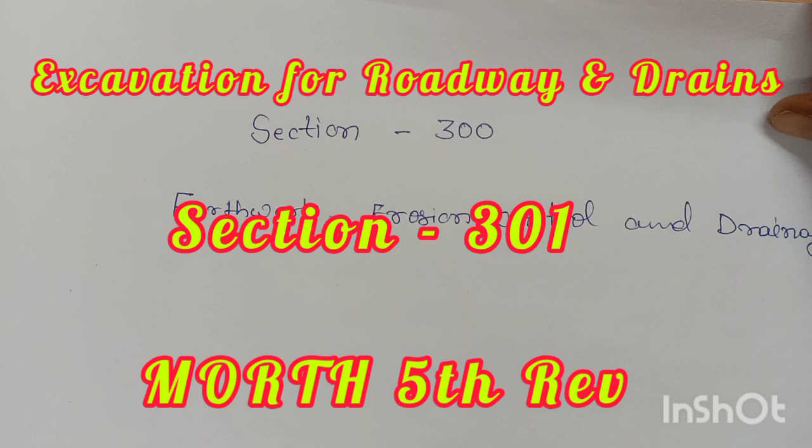300 is divided into many chapters: 301 excavation for roadway and drains, 302 blasting operations, 303 pre-splitting rock excavation slopes, 304 excavation for structures, 305 embankment construction, 306 soil erosion and sedimentation control, 307 turfing with sods.

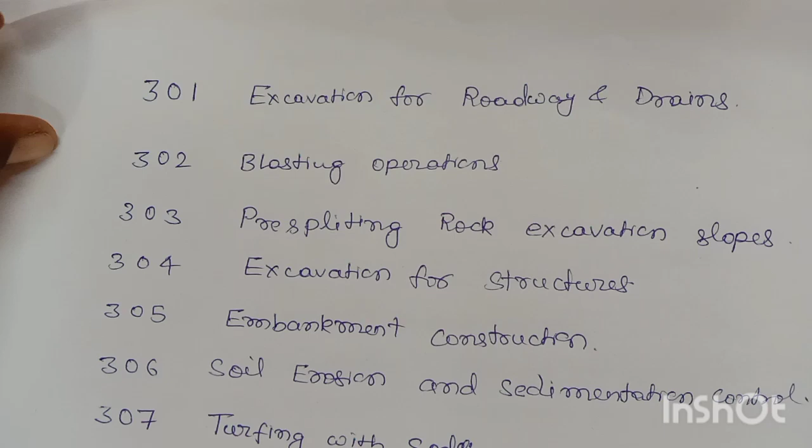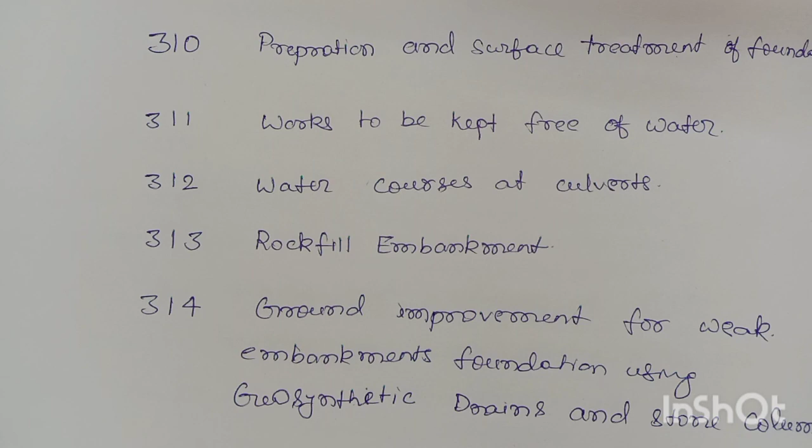308 seeding and mulching, 309 surface and subsurface drains, 310 preparation and surface treatment of foundation, 311 works to be kept free of water, 312 water course at culverts, 313 rock fill embankment, 314 ground improvement for weak embankment foundation using geosynthetic drains and stone columns.

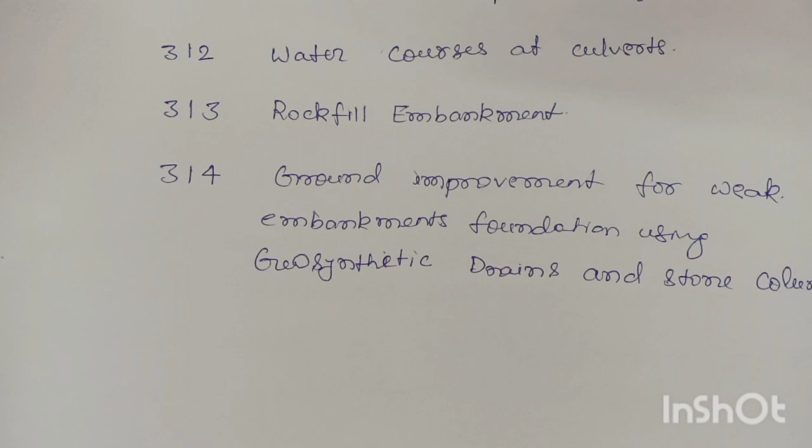301 excavation for roadway and drains. 301.1 scope. These works shall consist of excavation, removal and disposal of materials

necessary for the construction of roadways, side drains and waterways in accordance with requirements of the specification and the lines, grades and cross sections shown in the drawing or as indicated by the engineer.

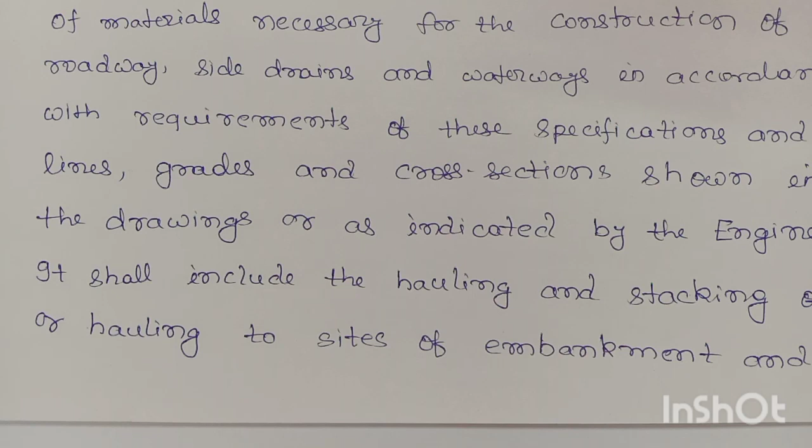It shall include the hauling and stacking, or hauling to sites of embankment and subgrade construction, suitable cut material as required, as also the disposal of unsuitable cut material in a specified manner with all leads and lifts, reuse of cut materials as may be deemed fit, trimming and finishing of the road to a specified dimension or as directed by the engineer.

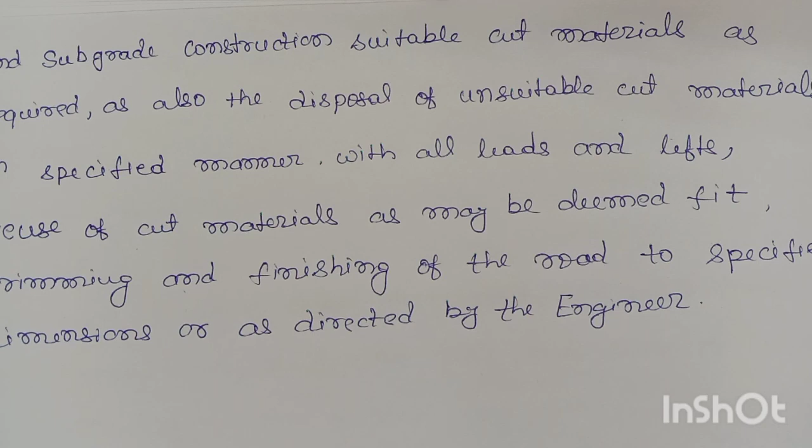Classification of excavated material. Classification: all materials involved in excavation shall be classified by the engineer in the following manner.

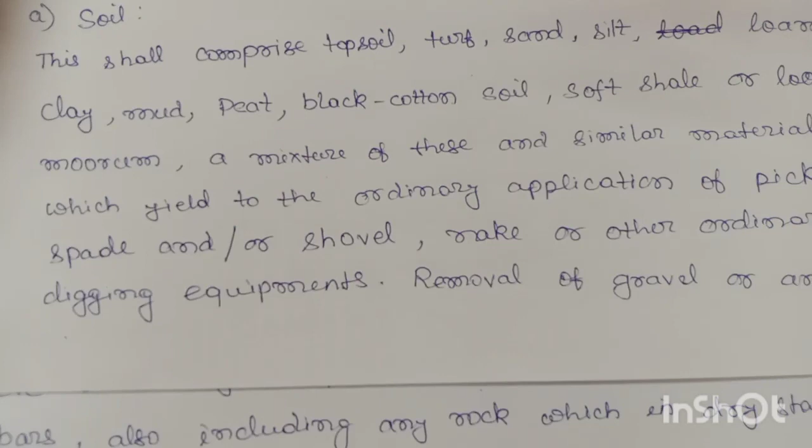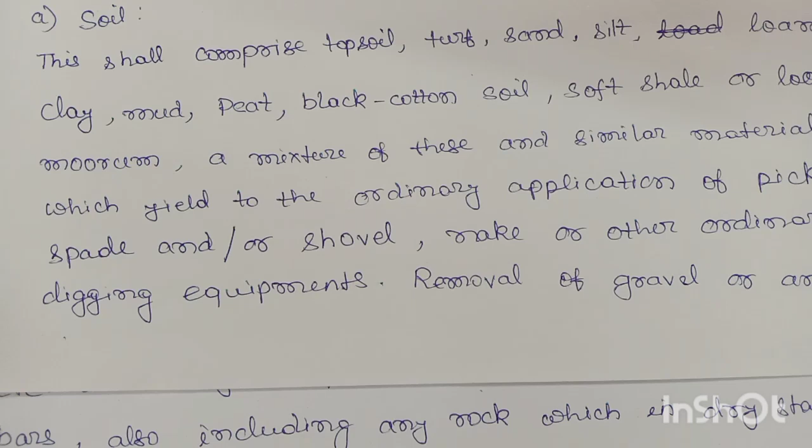Soil: this shall comprise topsoil, sand, silt, loam, clay, mud, peat, black cotton soil, soft shale or loose moorum, a mixture of these and similar material which yield to the ordinary application of pick, spade and or shovel, rake or other ordinary digging equipment. Removal of gravel or any other nodular material having dimension in any one direction not exceeding 75 mm shall be deemed to be covered under this category.

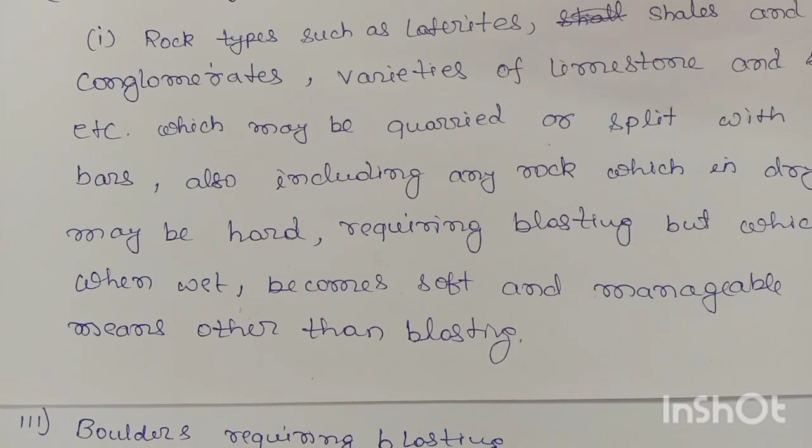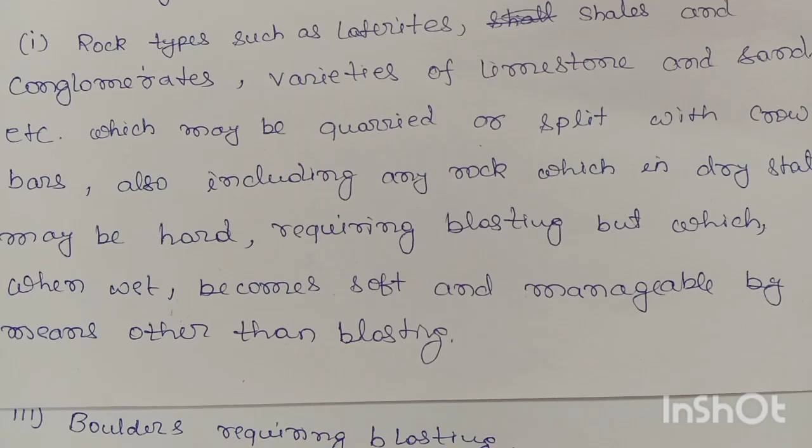Ordinary rock not requiring blasting: this shall include rock types such as laterite, shales, and conglomerates, variety of limestone and sandstone etc., which may be quarried or split with crowbar, also including any rock which in dry state may be hard, requiring blasting, but which when wet becomes soft and manageable by means other than blasting.

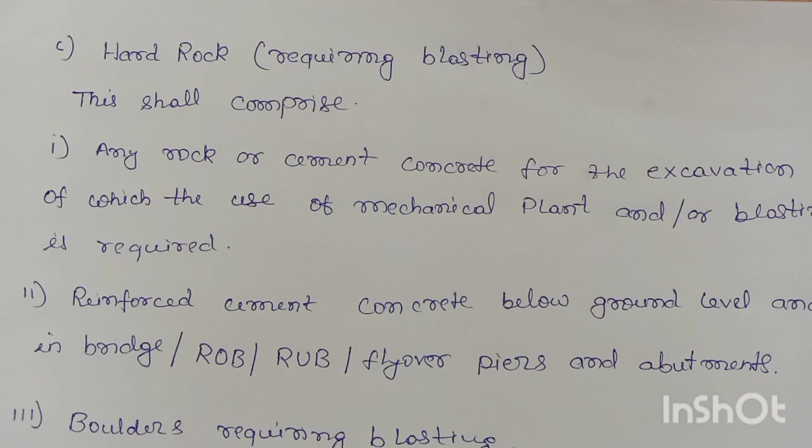Hard rock requiring blasting: this shall comprise any rock or cement concrete for the excavation of which the use of mechanical plant and or blasting is required. Second, reinforced cement concrete below ground level and in bridge, ROB, RUB, flyover, piers and abutments.

Boulders requiring blasting. Hard rock using controlled blasting: hard rock requiring blasting as described under C, but where controlled blasting is to be carried out in locations where built up areas, huts are situated within

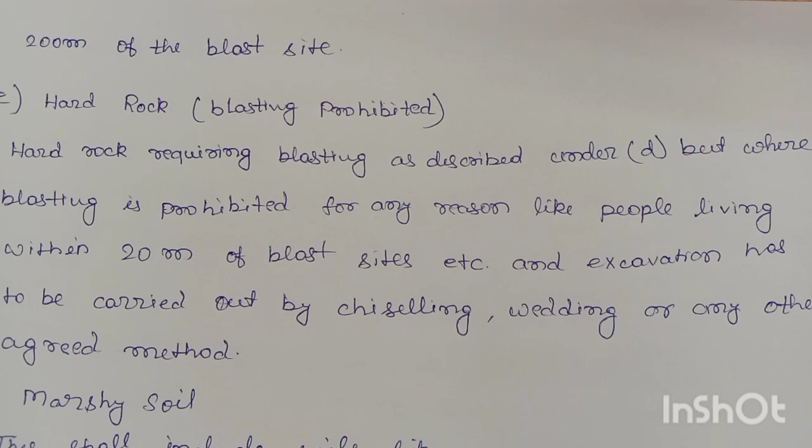200 meters of the blast site. Hard rock blasting prohibited: hard rock requiring blasting as described under D, but where blasting is prohibited for any reason like people living within 20 meters of blast site etc., and excavation has to be carried out by chiseling, wedging, or any other agreed method.

Marshy soil: this shall include soil like soft clay and peat, excavated below the original ground level of marshes and swamps, and soil excavated from other areas requiring continuous pumping or bailing out of water.

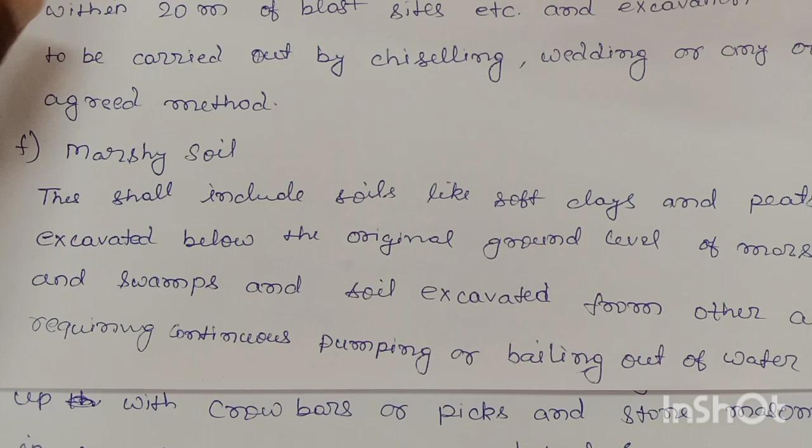Second number, macadam surface such as water bound and bitumen bound, soling of roads, road cement concrete pavements, cobble stone etc., compacted moorum or stabilized soil requiring use of pickaxe or shovel or both.

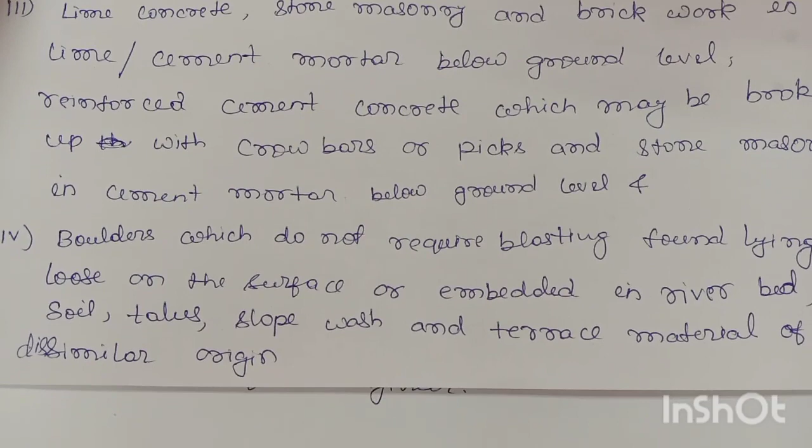Third number, lime concrete, stone masonry, and brickwork in lime cement mortar below ground level. Reinforced cement concrete, which may be broken up with crowbar or pick, and stone masonry in cement mortar below ground level. Boulders which do not require blasting, found laying loose on the surface or embedded in riverbed, soil, talus, slope wash and terrace material of dissimilar origin.

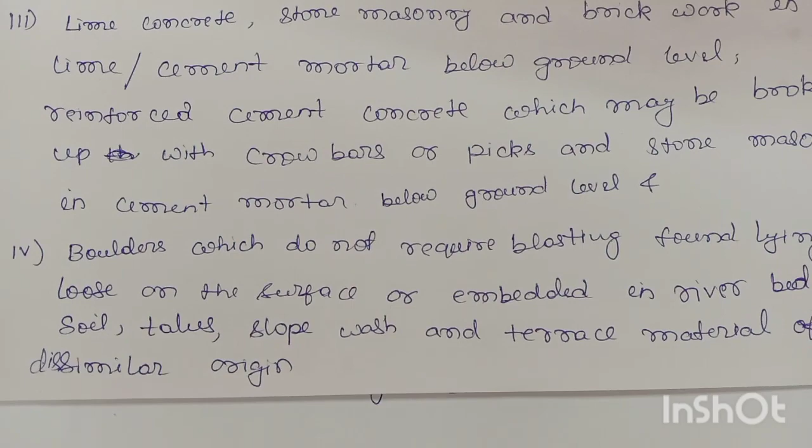301.2.2 Authority for classification. The classification of excavation shall be decided by the engineer and his decision shall be final and binding on the contractor. Merely the use of explosive in excavation will not be considered as a reason for higher classification unless blasting is clearly necessary in the opinion of the engineer.

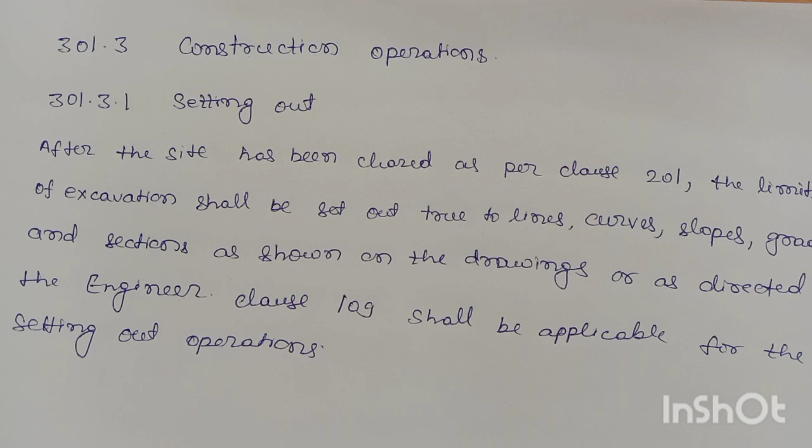301.3 Construction operation. 301.3.1 Setting out: after the site has been cleared as per clause 201, the limits of excavation shall be set out true to lines, curves, slopes, grades, and sections as shown on the drawing or as directed by the engineer. Clause 109 shall be applicable for the setting out operation.

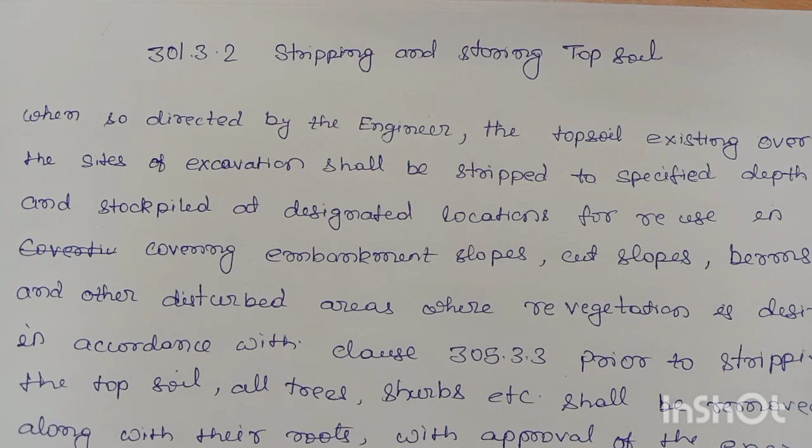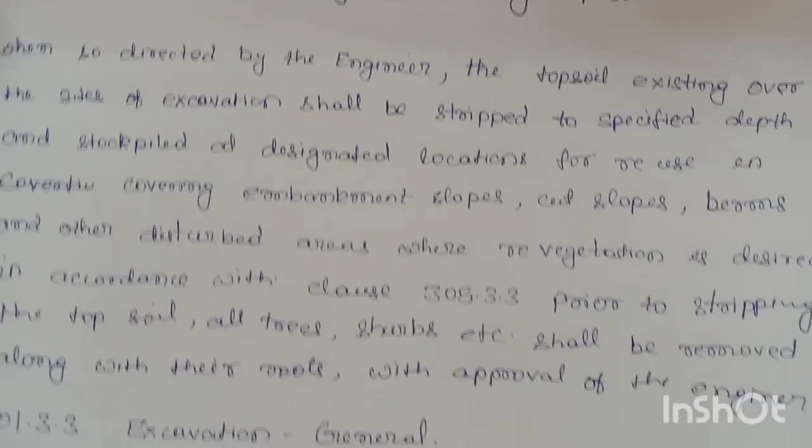301.3.2 Stripping and storage of topsoil. When so directed by the engineer, the topsoil existing over the site of excavation shall be stripped to a specified depth and stockpiled at a designated location for use in covering embankment slopes, cut slopes, berms, and other disturbed areas where revegetation is desired, in accordance with clause 305.3.3. Prior to stripping the topsoil, all trees, shrubs, etc. shall be removed, along with their roots, with approval of the engineer.

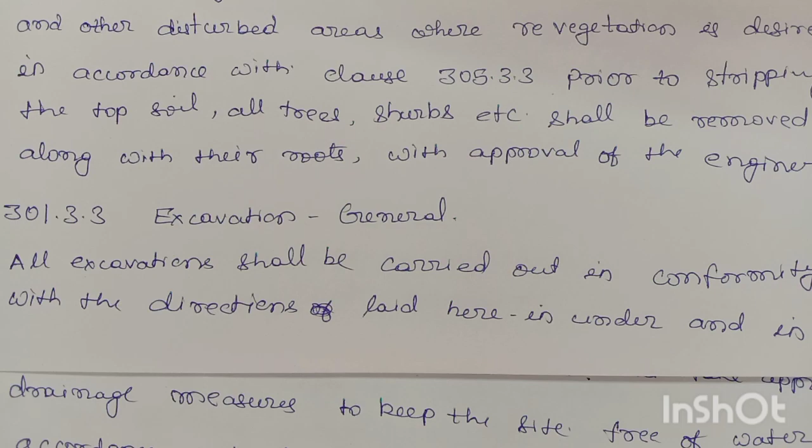301.3.3 Excavation General. All excavations shall be carried out in conformity with the direction laid herein under and in a manner approved by the engineer. The work shall be so done that the suitable materials available from excavation are satisfactorily utilized as deemed fit or as approved by the engineer.

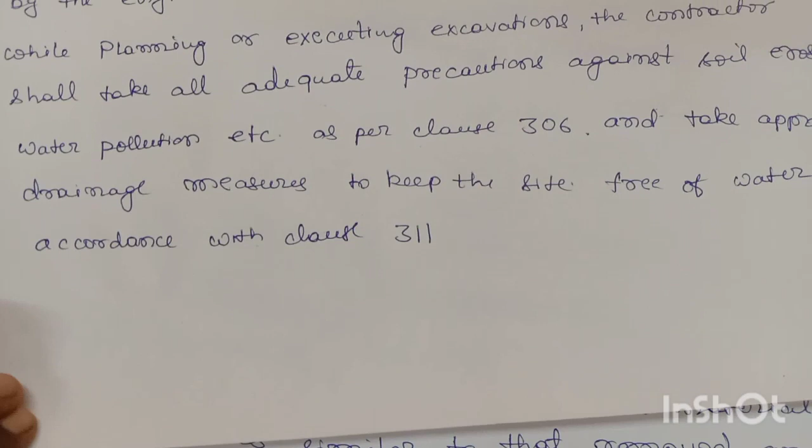While planning or executing excavation, the contractor shall take all adequate precautions against soil erosion, water pollution, etc., as per clause 306, and take appropriate drainage measures to keep the site free of water in accordance with clause 311.

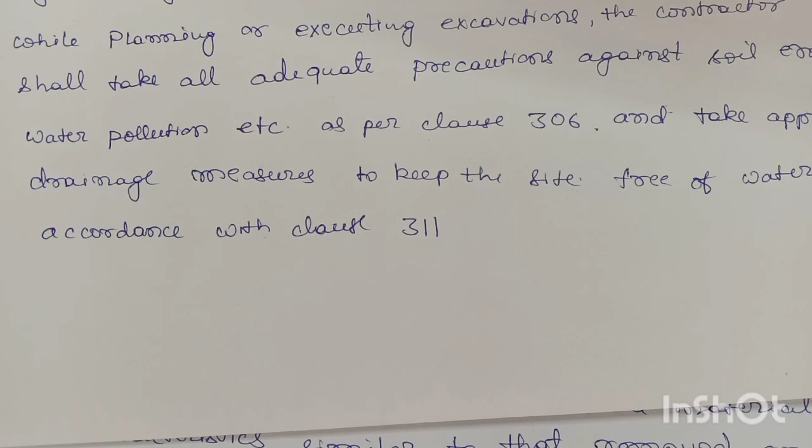The excavation shall conform to the lines, grades, side slopes, and levels shown on the drawing or as directed by the engineer. The contractor shall not excavate outside the limits of excavation, subject to the permitted tolerances.

Any excess depth or width excavated beyond the specified levels or dimensions on the drawing shall be made good at the cost of the contractor with suitable material of characteristics similar to that removed and compacted to the requirement of clause 305.

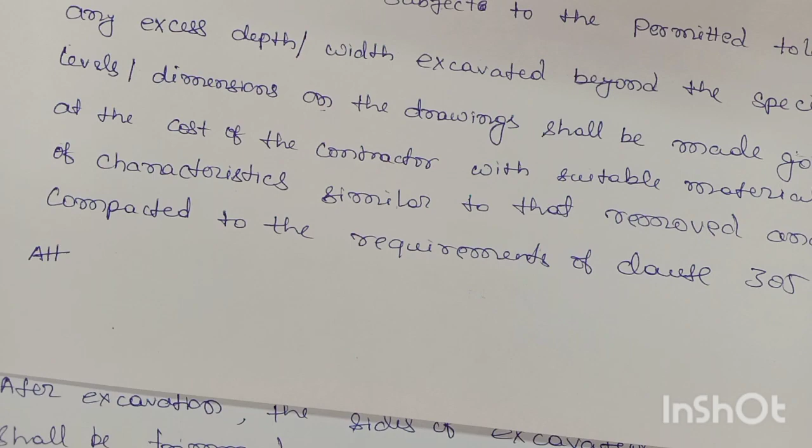All debris and loose materials on the slopes of cutting shall be removed. No backfilling shall be allowed to obtain required slopes, excepting that when boulders or soft materials are encountered in cut slopes. These shall be excavated to an approved depth on instruction of the engineer and the resulting cavities filled with suitable material and thoroughly compacted.

In an appropriate manner, after excavation, the sides of the excavated area shall be trimmed and the area contoured to minimize erosion and ponding, allowing for natural drainage to take place.

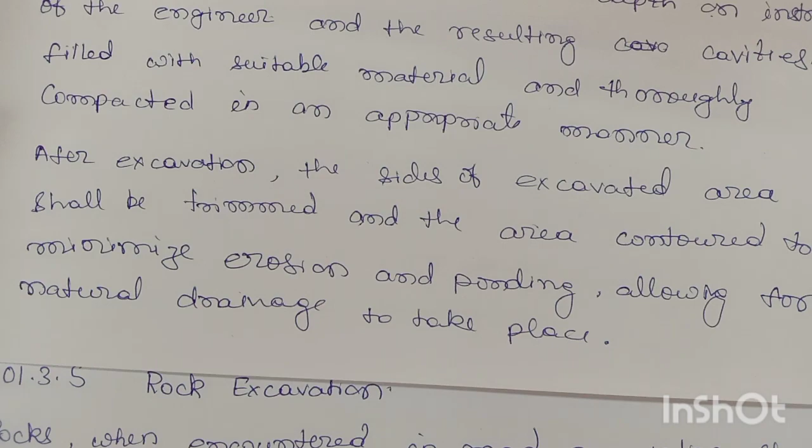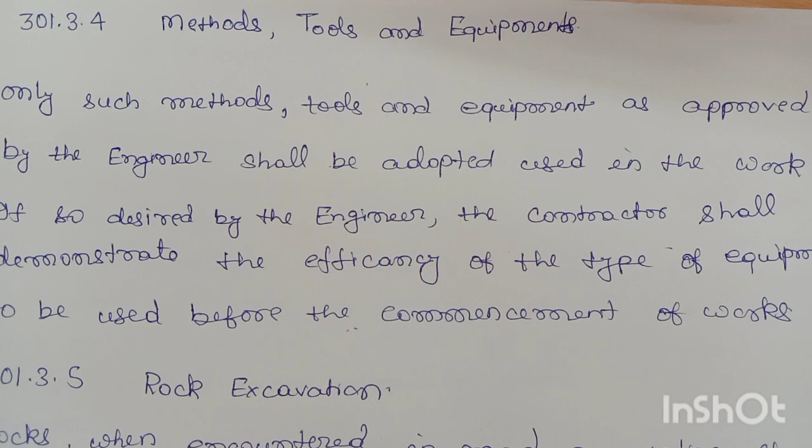301.3.4 Methods, tools and equipments. Only such methods, tools and equipments as approved by the engineer shall be adopted or used in the work. If so desired by the engineer, the contractor shall demonstrate the efficacy of the type of equipment to be used before the commencement of work.

301.3.5 Rock excavation. Rock, when encountered in road excavation, shall be removed up to the formation level or as otherwise indicated in the drawing. Where, however, unstable shales or other unsuitable material are encountered at the formation level, these shall be excavated to the extent of 500 mm below the formation level or as otherwise specified.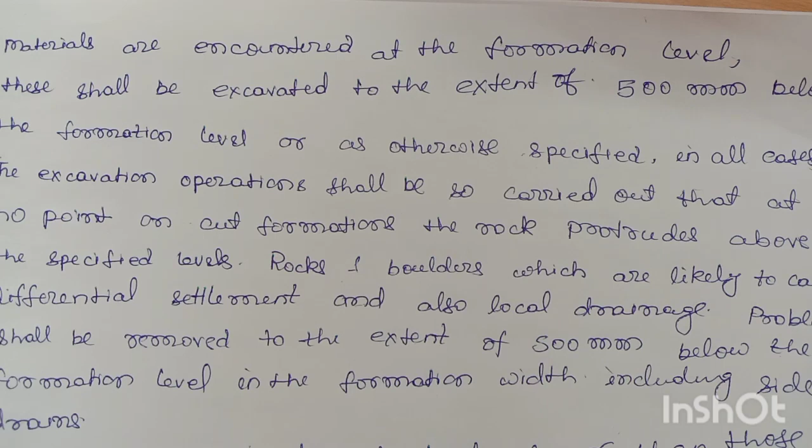In all cases, the excavation operation shall be so carried out that at no point on the cut formation does the rock protrude above the specified levels. Rock boulders which are likely to cause differential settlement and also local drainage problems shall be removed to the extent of 500 mm below the formation level.

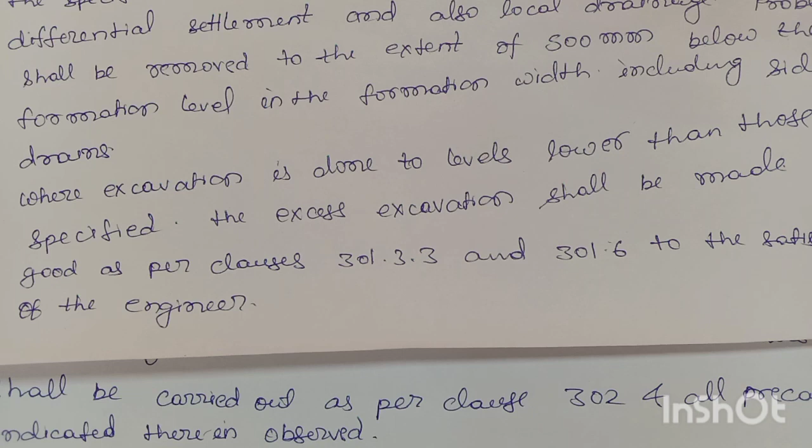In the formation width, including side drains, where excavation is done to levels lower than those specified, the excess excavation shall be made good as per clause 301.3.3 and 301.6 to the specification of the engineer, to the satisfaction of the engineer.

Slopes in rock cutting shall be finished to uniform lines corresponding to slope lines shown on the drawing or as directed by the engineer. Notwithstanding the foregoing, all loose pieces of rock on the excavated slope surface which move when pierced by a crowbar shall be removed.

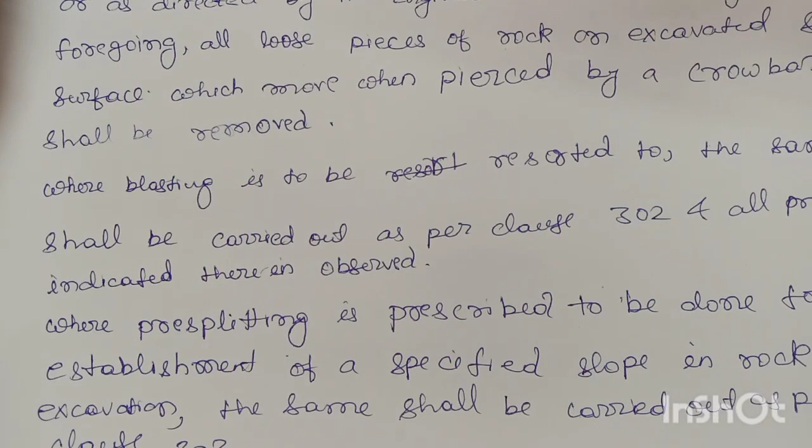Where blasting is to be resorted to, the same shall be carried out as per clause 302, and all precautions indicated therein observed. Where pre-splitting is prescribed to be done for the establishment of a specified slope in rock excavation, the same shall be carried out as per clause 303.

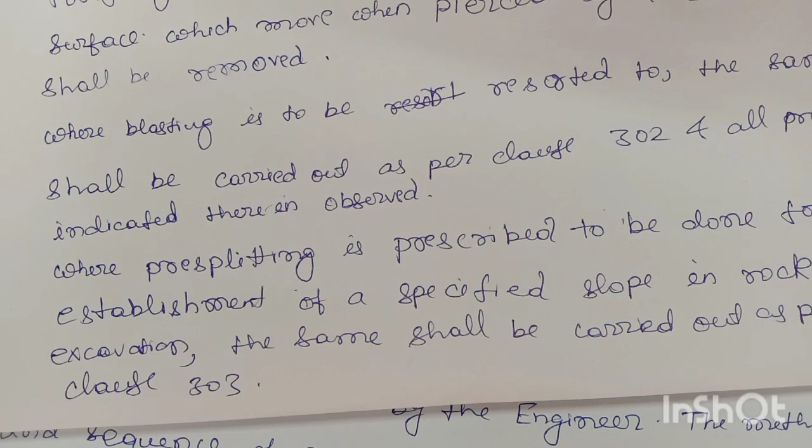301.3.6 Marsh excavation. The excavation of soil from marshes and swamps shall be carried out as per the program approved by the engineer. Excavation of marshes shall begin at one end and proceed in one direction across the entire marsh, immediately ahead of backfilling with material like boulders, sand, moorum, brick bats, dismantled concrete as approved by the engineer. The method and sequence of excavating and backfilling shall be such as to ensure, to the extent practicable, the complete removal or displacement of all muck.

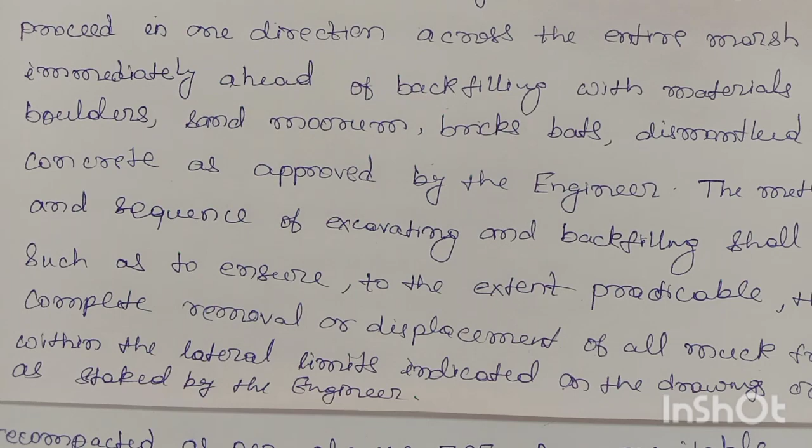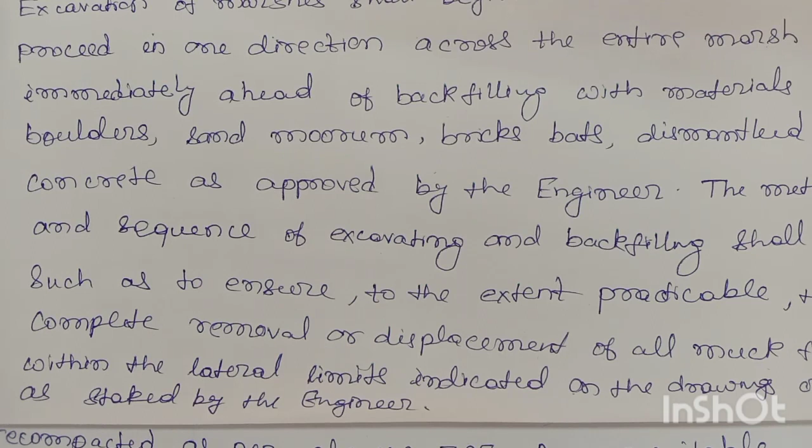The complete removal or displacement of all muck from within the lateral limits indicated on the drawing or as staked by the engineer.

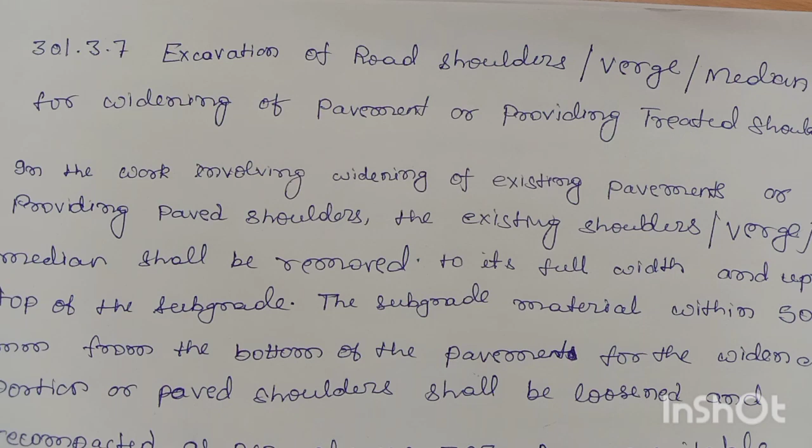301.3.7 Excavation of road shoulders, verge, median for widening of pavement or providing treated shoulders. In work involving widening of existing pavements or providing paved shoulders, the existing shoulder, verge, median shall be removed to its full width and up to the top of the subgrade. The subgrade material within 500 mm from the bottom of the pavement for the widened portion or paved shoulder shall be loosened and compacted as per clause 305.

Any unsuitable material found in this portion shall be removed and replaced with suitable material. While doing so, care shall be taken to see that no portion of the existing pavement designated for retention is loosened or disturbed. If the existing pavement gets disturbed or loosened, it shall be dismantled and cut to a regular shape with sides vertical, and the disturbed loosened portion removed completely and relayed as directed by the engineer at the cost of the contractor.

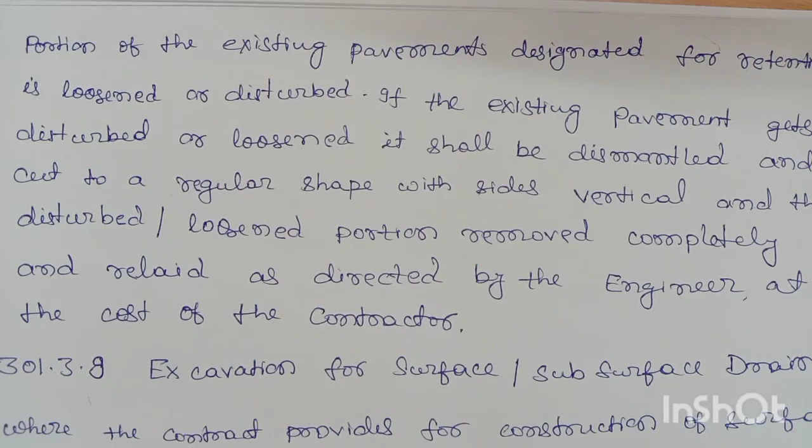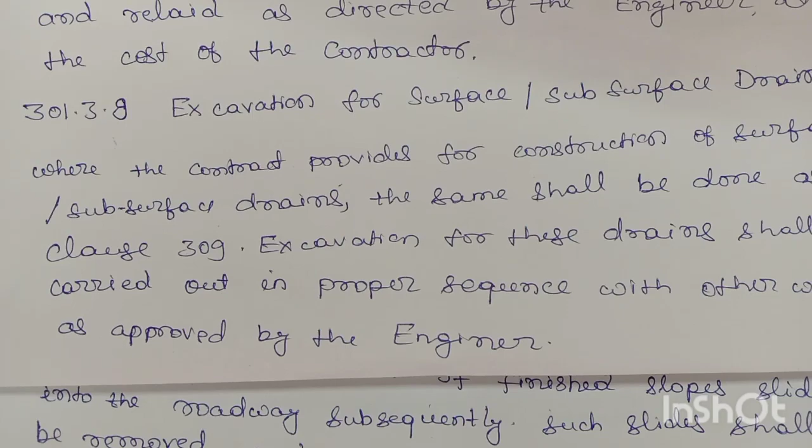301.3.8 Excavation for subsurface drains, where the contract provides for construction of surface drains, the same shall be done as per clause 309. Excavation for these drains shall be carried out in proper sequence with other works as approved by the engineer.

301.3.9 Slides. If slips, slides, over breaks or subsidence occur in cutting during the process of construction, they shall be removed at the cost of the contractor as ordered by the engineer. Adequate precautions shall be taken to ensure that during construction the slopes are not rendered unstable or give rise to recurrent slides after construction. If finished slopes slide into the roadway, subsequently such slides shall be removed and paid for at the contract rate for the class of excavation involved, provided the slides are not due to any negligence on the part of the contractor.

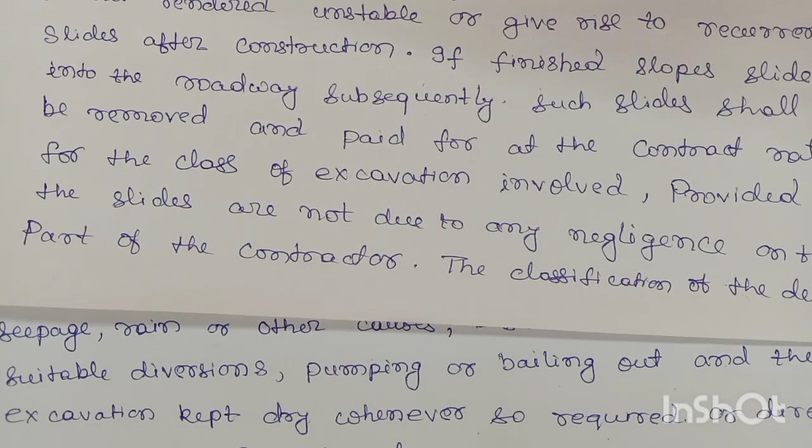The classification of the debris material from the slips, slides, etc. shall conform to its condition at the time of removal, and payment made accordingly, regardless of its condition earlier.

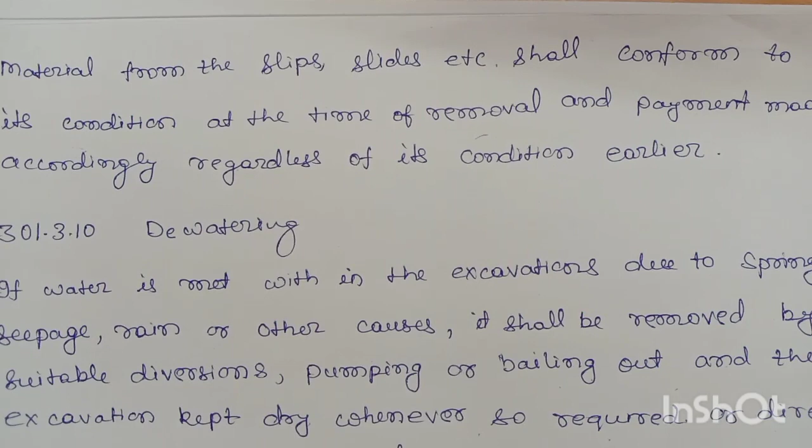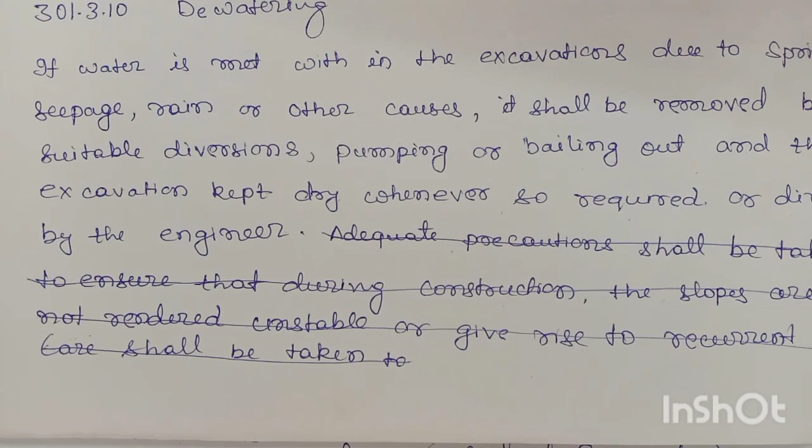301.3.10 Dewatering. If water is met with in the excavation due to springs, seepage, rain or other causes, it shall be removed by suitable diversion, pumping or bailing out, and the excavation kept dry whenever so required or directed by the engineer.

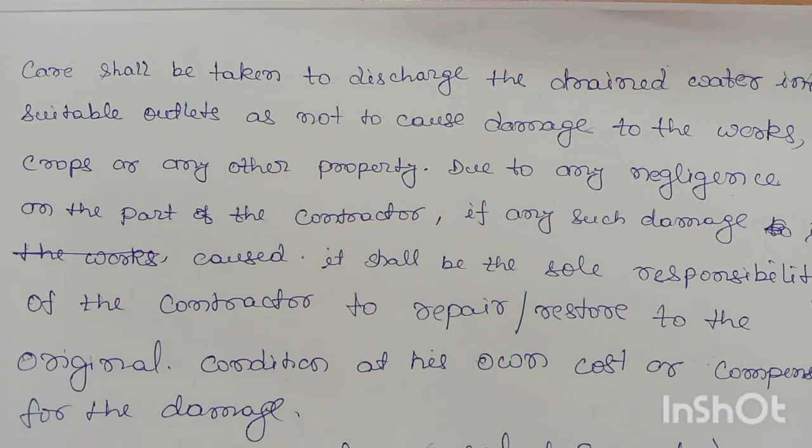Care shall be taken to discharge the drained water into suitable outlets so as not to cause damage to the works, crops, or any other property due to any negligence on the part of the contractor. If any such damage is caused, it shall be the sole responsibility of the contractor to repair, restore to the original condition at his own cost, or compensate for the damage.

301.3.11 Use and disposal of excavated material. All the excavated materials shall either be reused with the approval of the engineer or disposed of with all leads and lifts as directed by the engineer.

301.3.12 Backfilling. Backfilling of the masonry, concrete, hume pipe, or drain excavation shall be done with approved material, with all leads and lifts, after concrete masonry hume pipe is fully set, and carried out in such a way as not to cause undue thrust on any part of the structure and or not to cause differential settlement.

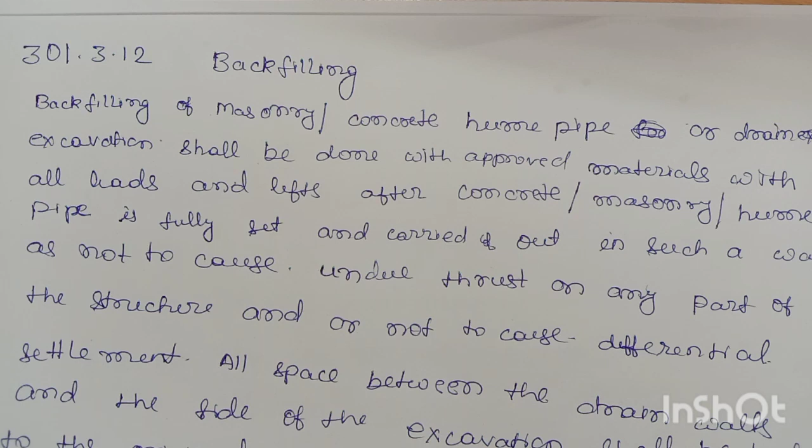All space between the drain walls and the side of the excavation shall be backfilled to the original surface, making due allowance for settlement in layers not exceeding 150 mm compacted thickness to the required density, using suitable compaction equipment such as trench compactor, mechanical tamper, rammer, or plate compactor as directed by the engineer.

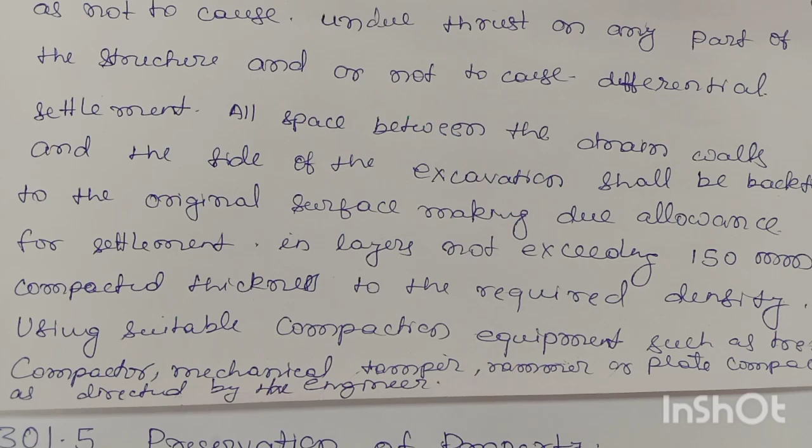301.4 Plying of construction traffic. Construction traffic shall not use the cut formation and finished subgrade without the prior permission of the engineer. Any damage arising out of such use shall be made good by the contractor at his own cost.

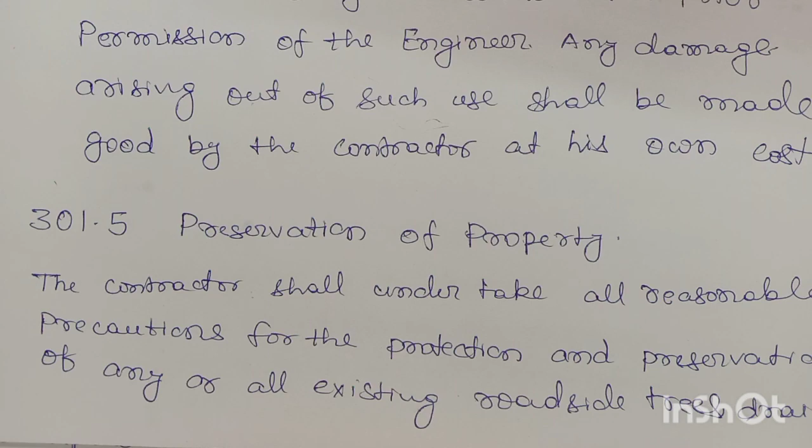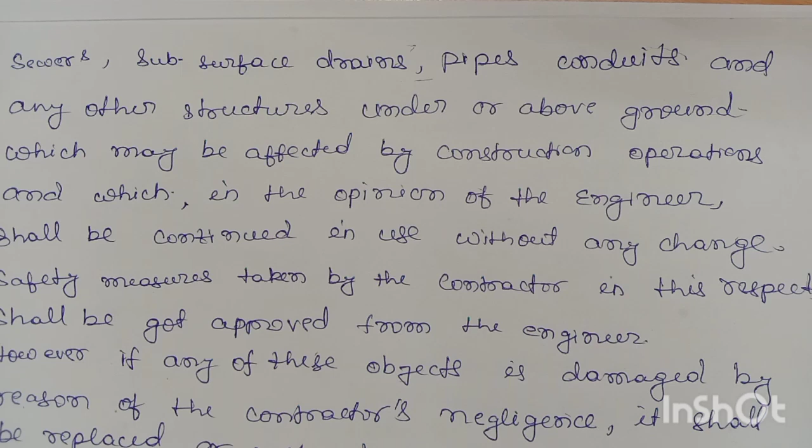301.5 For the preservation of property, the contractor shall undertake all reasonable precautions for the protection and preservation of any or all existing roadside trees, drains, sewer, subsurface drains, pipes, conduit, and any other structures under or above ground which may be affected by construction operation and which, in the opinion of the engineer, shall be continued in use without any change. Safety measures taken by the contractor in this respect shall be got approved from the engineer.

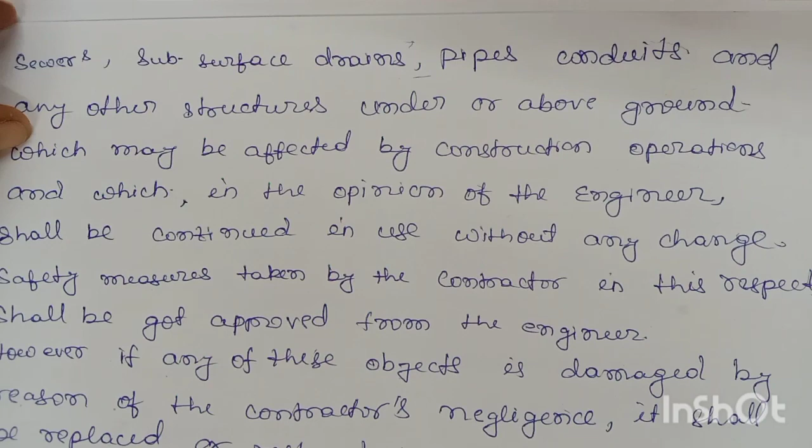However, if any of these objects is damaged by reason of the contractor's negligence, it shall be replaced or restored to the original condition at his cost.

If the contractor fails to do so within the required time as directed by the engineer, or if in the opinion of the engineer the action initiated by the contractor to replace or restore the damaged objects is not satisfactory, the engineer shall arrange the replacement or restoration directly through any other agency at the risk and cost of the contractor, after issuing prior notice to that effect.

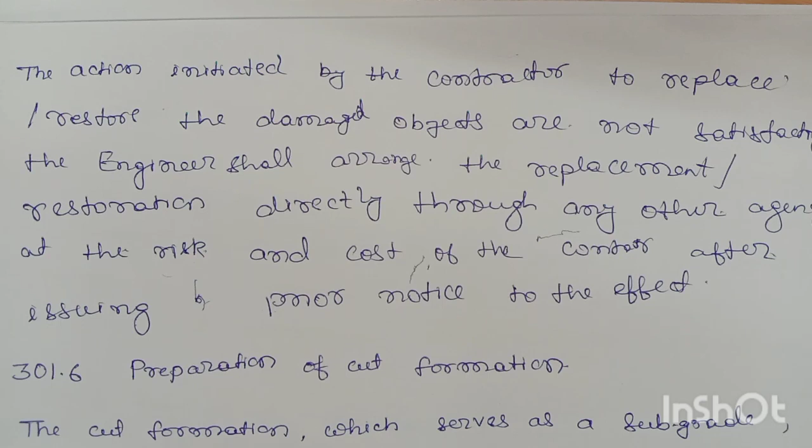Preparation of cut formation.

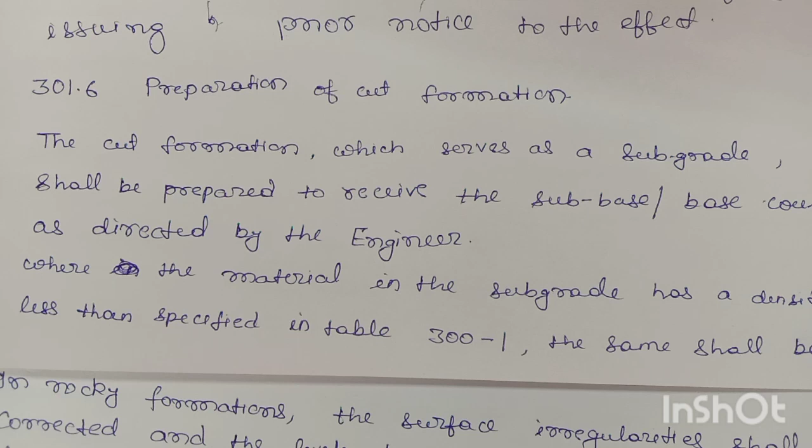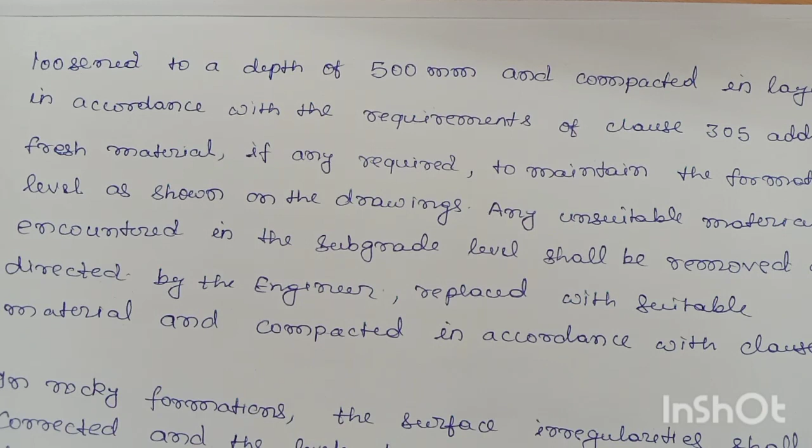The cut formation which serves as a subgrade shall be prepared to receive the base course as directed by the engineer. Where the material in the subgrade has a density less than specified in table 300-1, the same shall be loosened to a depth of 500 mm and compacted in layers in accordance with the requirements of clause 305, adding fresh material if required to maintain the formation level as shown in the drawing. Any unsuitable material encountered in the subgrade level shall be removed as directed by the engineer, replaced with suitable material and compacted in accordance with clause 305.

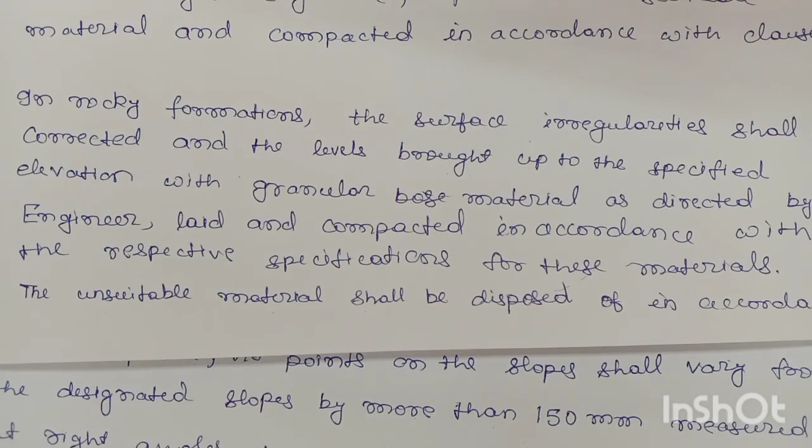In rocky formation, the surface irregularities shall be corrected and the level brought up to the specified elevation with granular base material as directed by the engineer, laid and compacted in accordance with the respective specification for the materials. The unsuitable materials shall be disposed of in accordance with clause 301.3.11. After satisfying the density requirement, the cut formation shall be prepared to receive the base course in accordance with clause 310 and 311.

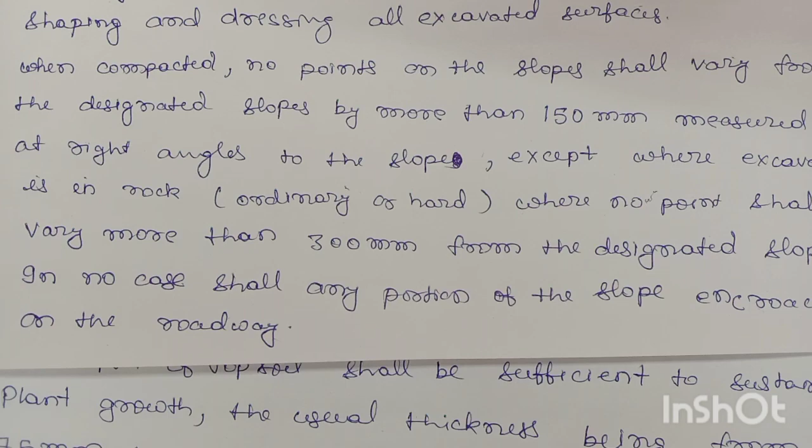Finishing operations shall include the work of properly shaping and dressing all excavated surfaces. When compacted, no points on the slope shall vary from the designated slope by more than 150 mm measured at right angles to the slope, except where excavation is in rock, ordinary or hard, where no point shall vary more than 300 mm from the designated slope. In no case shall any portion of the slope encroach on the roadway.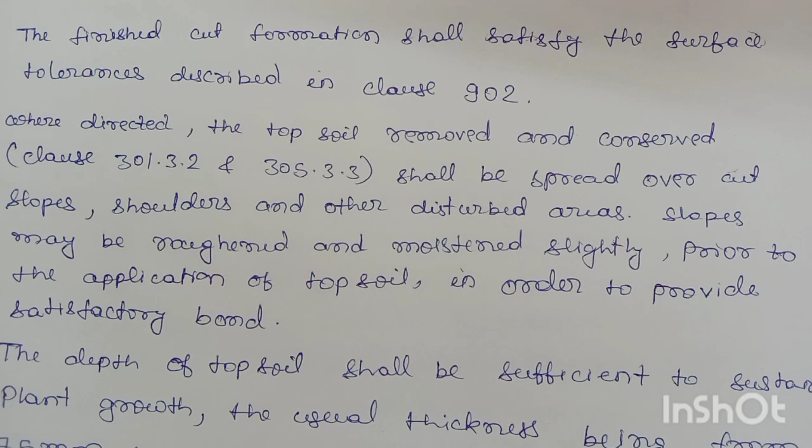The finished cut formation shall satisfy the surface tolerance described in clause 902, where directed the topsoil removed and conserved as per clause 301.3.2 and 305.3.3 shall be spread over cut slopes, shoulders, and other disturbed areas. Slopes may be roughened and moistened slightly prior to the application of topsoil in order to provide satisfactory bond. The depth of topsoil shall be sufficient to sustain plant growth, the usual thickness being from 75 mm to 100 mm.

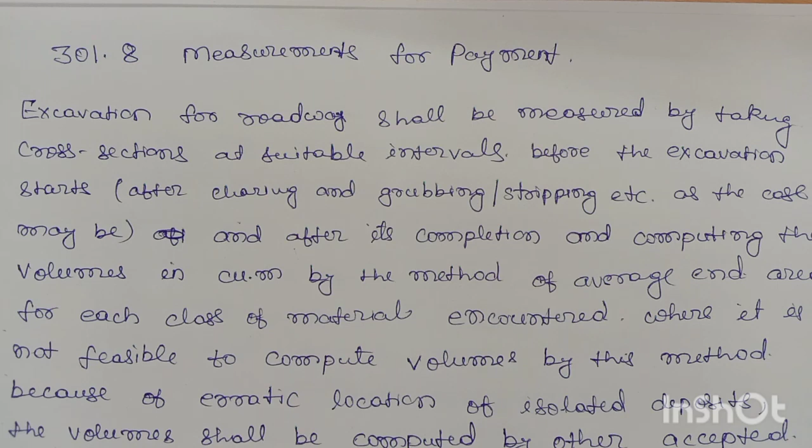301.8 Measurement for payments. Excavation for roadway shall be measured by taking cross sections at suitable intervals before the excavation starts, after clearing and grubbing, stripping etc. as the case may be, and after its completion, and computing the volumes in cum by the method of average end areas for each class of material encountered. Where it is not feasible to compute volumes by the method because of erratic location of isolated deposits, the volume shall be computed by other accepted methods.

At the option of the engineer, the contractor shall leave depth indicators during excavation of such shapes and size and in such position as directed, so as to indicate the original ground level as accurately as possible. The contractor shall see that these remain intact till the final measurements are taken.

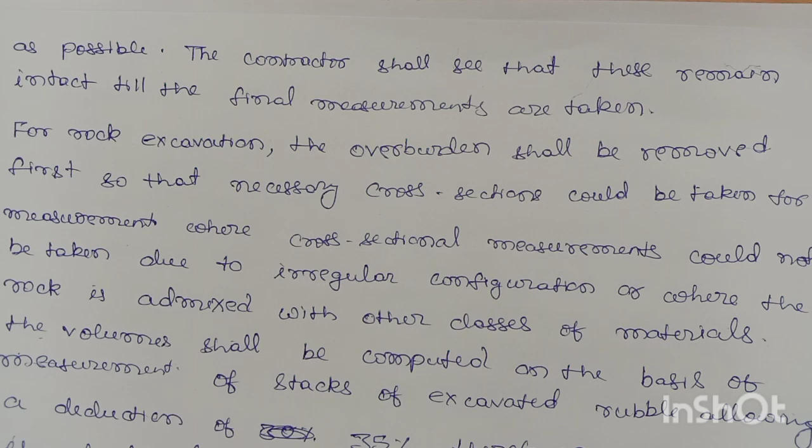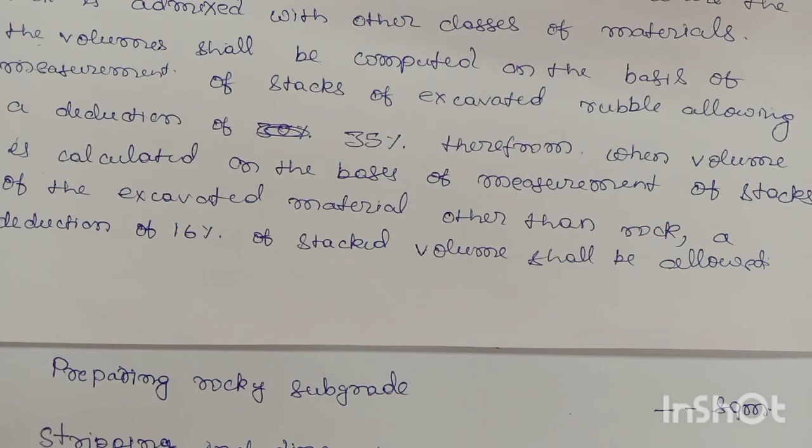For rock excavation, the overburden shall be removed first so that necessary cross-sections would be taken for measurement, where cross-sectional measurement could not be taken due to irregular configuration or where the rock is admixed with other classes of material. The volume shall be computed on the basis of measurement of stacks of excavated rubble, allowing a deduction of 35% therefrom. When volume is calculated on the basis of the measurement of stacks of the excavated material other than rock, a deduction of 16% of stocked volume shall be allowed.

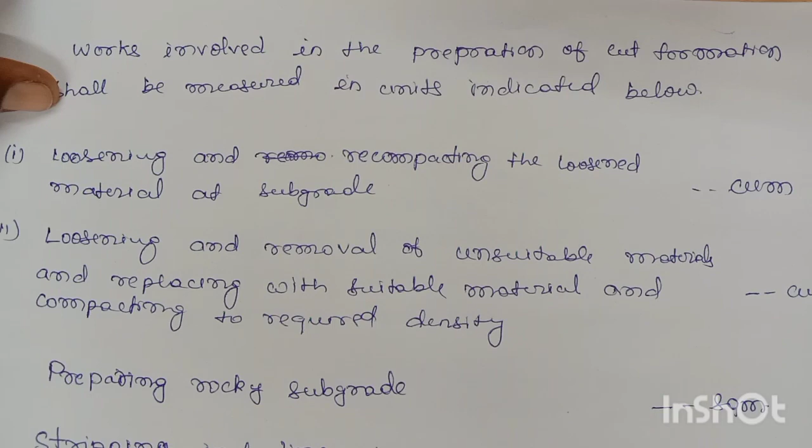Work involved in the preparation of cut formation shall be measured in units indicated below: loosening and recompacting the loosened material at subgrade in cum; loosening and removal of unsuitable material and replacing with suitable material and compacting to required density in cum; preparing rocky subgrade in square meter; stripping including storing and application of topsoil in cum.

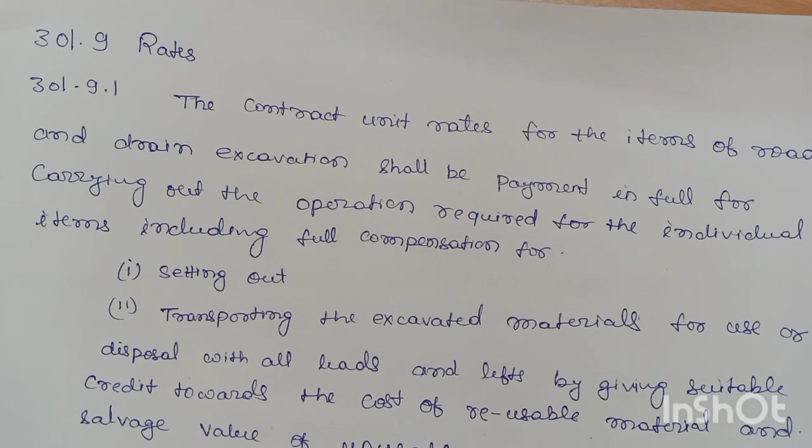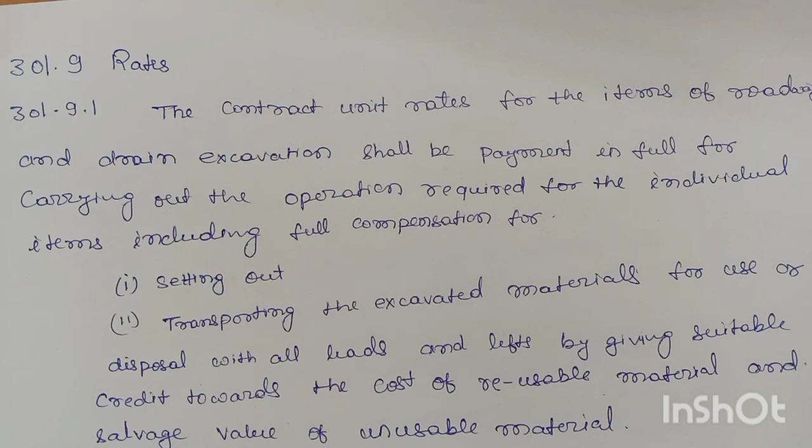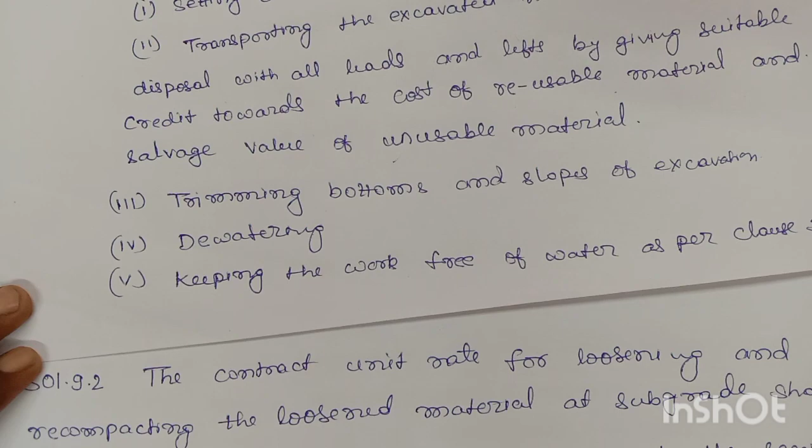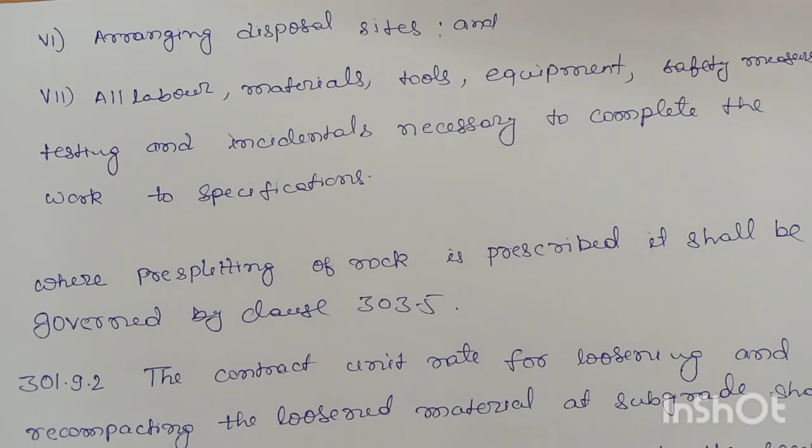301.9 Rates. The contract unit rate for the item of roadway excavation shall be payment in full for carrying out the operations required for the individual items, including full compensation for setting out, transporting the excavated material for use or disposal with all leads and lifts, giving suitable credit towards the cost of reusable materials and salvage value of unusable material, trimming bottoms and slopes of excavation, dewatering, keeping the work free of water as per clause 311, arranging disposal sites, and all labor, materials, tools, equipment, safety measures, testing and incidentals necessary to complete the work to specification. Where pre-splitting of rock is prescribed, it shall be governed by clause 303.5.

301.9.2 The contract unit rate for loosening and recompacting the material at subgrade shall include full compensation for loosening to the specified depth, including breaking clods, spreading in layers, watering where necessary, and compacting to the requirements.

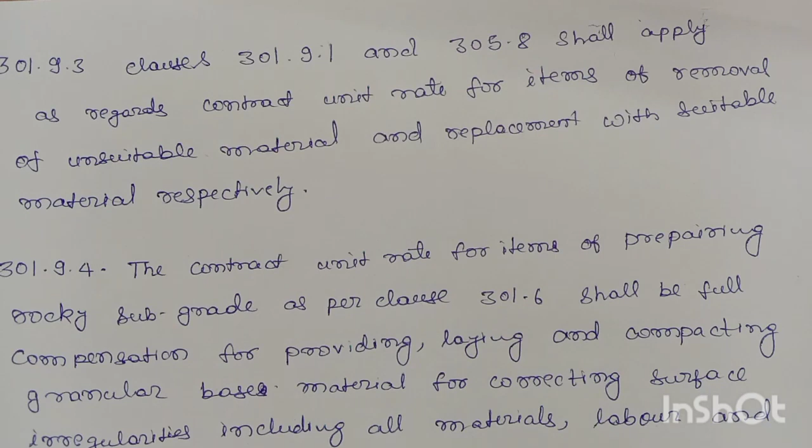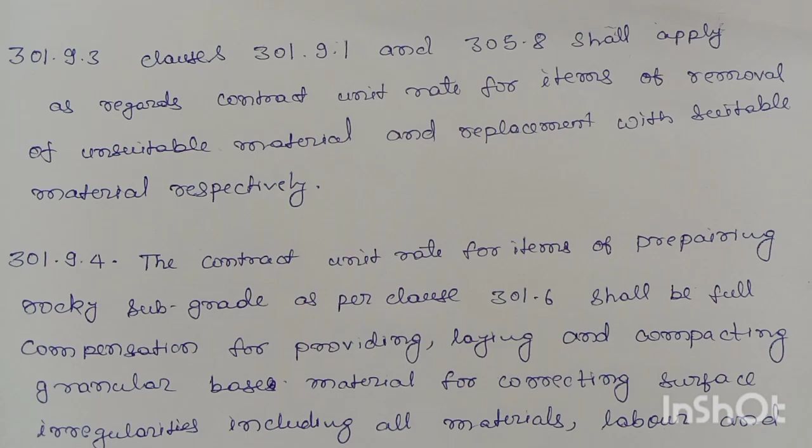301.9.3 Clause 301.9.1 and 305.8 shall apply as regards contract unit rate for items of removal of unsuitable material and replacement with suitable material respectively. 301.9.4 The contract unit rate for items of preparing rocky subgrade as per clause 301.6 shall be full compensation for providing, laying and compacting granular base material for correcting surface irregularities, including all materials, labor, and incidentals necessary to complete the work, and all leads and lifts.